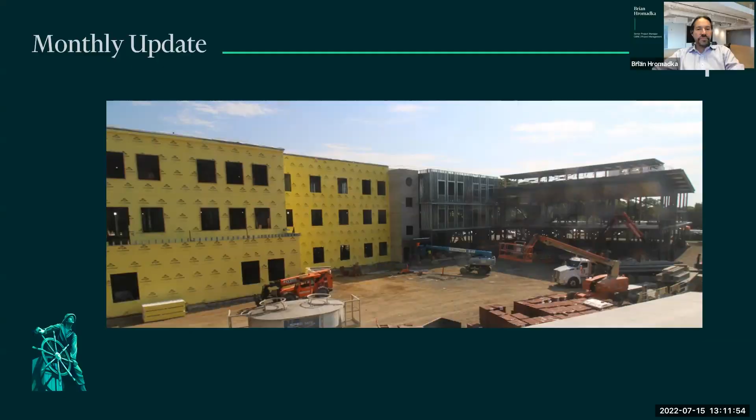Switch to the next slide here. So overall, the project continues to track to an on-time completion. We had a 13-day lag that showed up in the schedule last month, and that has been cut in half, leaving a 7-day lag in the current schedule update. You'll have that full schedule in the back of the monthly report. We're projecting that that 7-day lag will disappear in the next month or 2.

The CM has been actively managing all the work on site to keep things on schedule. We did have some slippage with the building B steel and glulam taking a little longer than anticipated, but we've had some expedited work with the interior rough-in that has helped to make up for that and keep the schedule where we need it. The project also is tracking to the budget, so that's good.

We continue to have some concerns about lead times, but so far we've been able to have the materials that we need on site when we need them so that the work can progress. Much of that is due to the CM being proactive with communicating with the subs and getting submittals sent in and approved earlier than normal. We're also still seeing construction prices very high, but thankfully, since we have fixed price contracts now on this job, we're protected from any further escalation.

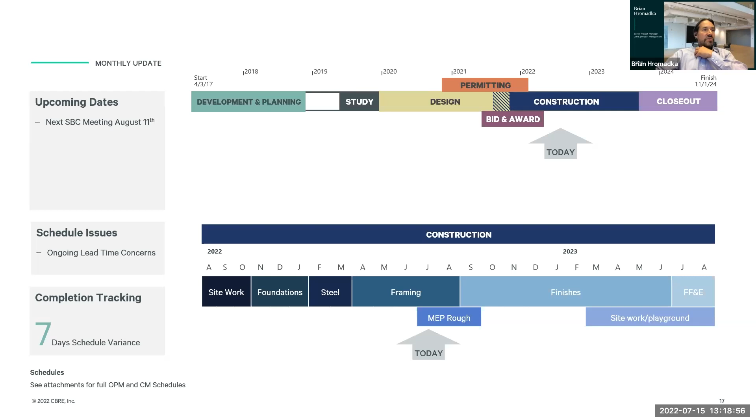The OPM continues to do the same thing pretty much as last month, managing the overall project. We've been finalizing decisions and contracts with the utility company and the health department, and also handling final site items with the school district—trash cans, benches, EV chargers, and the like. We continue to file regular reports to the MSBA to update them on the project and review potential change orders coming up throughout construction.

We are also keeping the community up to date. Last month we had a concrete pour in Building B that went off without a hitch. Notifications were sent out via email and flyers to all local residents. We have temporary construction lights on now at night on all floors, providing light during the day when workers are working since a lot of the building is enclosed, and after hours for safety and security on the job site.

We have one more concrete pour scheduled for the 21st, which will be a longer activity—the slab on grade for Building B. That work is expected to extend late into the evening with some work lights, but minimal noise. Once again, we'll be sending out notices to all the neighbors via email and flyers, and there's also information posted on the project website.

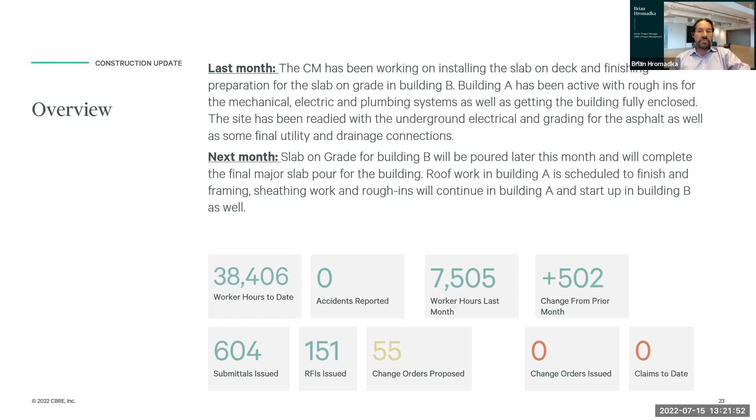CM continues to make progress with the work and run a job site free of injury with good, safe working conditions. They've been progressing a lot on the interior of the building, as well as the exterior of Building A, and some significant accomplishments in Building B with the steel substantially complete and almost all the slabs complete at this point. Here you can see some of the milestones we've been tracking throughout the job. Some of these have been ahead of schedule, some of them are behind schedule, but overall the job is tracking within the substantial completion date of June of next year.

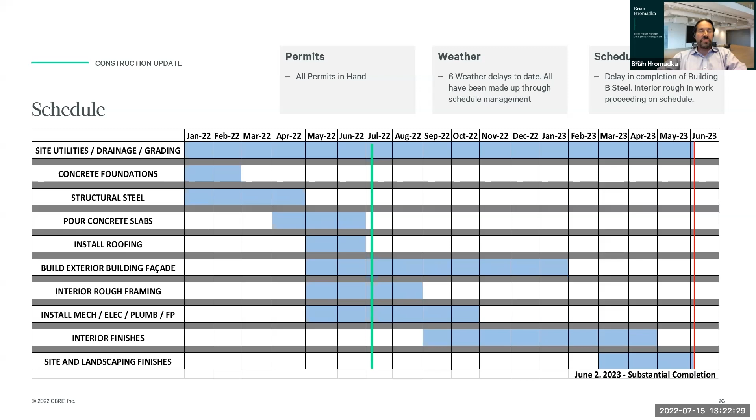So I will let our CM, Alex, walk you through some of the details about what's been happening on the site. This month we're going to look more at the interior of the building using the OpenSpace program that provides a lot of insight into what's been happening on the job. So I'll stop sharing my screen here.

And Alex, if you can pick up. Yeah, it looks like my screen sharing capabilities are disabled at the moment. I don't know if someone can let me in. Yeah, I think Maria can help us out with that. All set, thanks Maria.

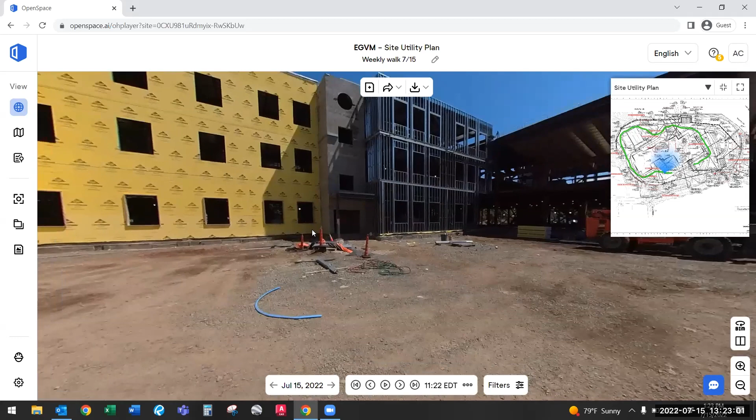Can you guys see my screen all right? Okay, all right, so I'm just going to spend a moment talking exterior. I'm sure many of you have driven by the building and seen what's going on, but I'll give you a brief tour of the exterior and get more into the interior, as Brian mentioned, in a second. So again, we're probably 75% complete with sheathing on what we're considering A building, which is the 3-story classroom wing.

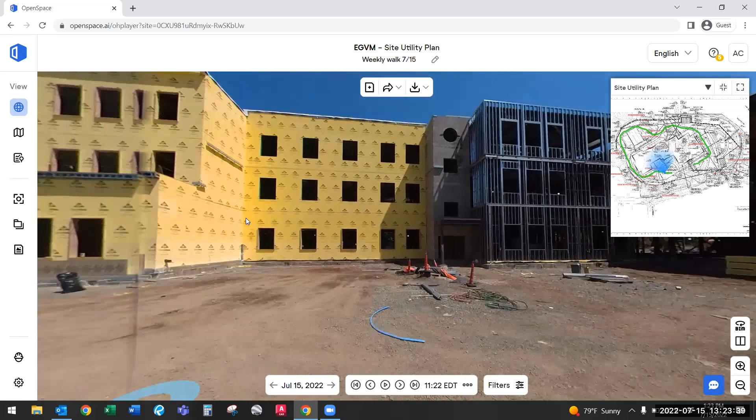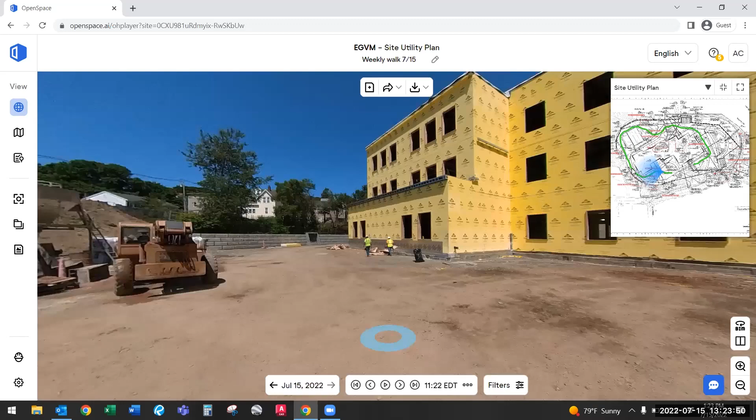You can see the stairwells, both stair 1 to the left and stair 2, fully constructed. We actually have stairs installed and poured with concrete, which is allowing us better access through the 3 stories of the A building. So again, 75% complete with sheathing, which is what we call, or what you see as the yellow material here. I'm going to work clockwise around the building.

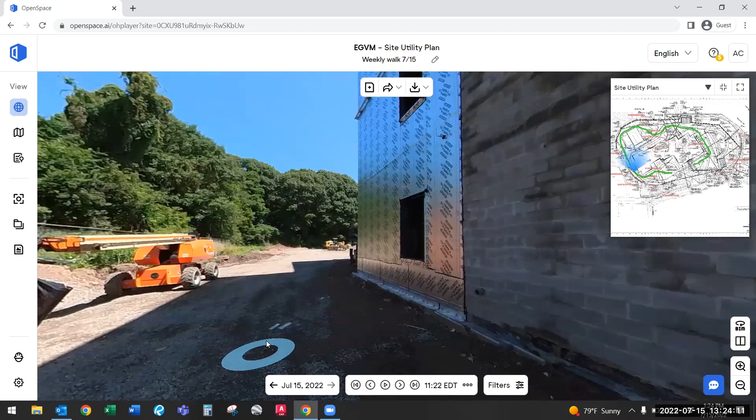So you can see this is stair 1, CMU shaft wall that'll get enclosed, or wrapped, with brick. This metal foil material you see is the air vapor barrier, so that goes on over the yellow sheathing. That provides a nice enclosure, not allowing air or vapor barrier into the building.

Working our way northwest of the building now, you can see most of the yellow sheathing is up on the back side of A building. You can see the amount of fenestration on the north side of the building as well, with all the window openings. This large area here is actually full 3-story curtain wall at the extended learning area.

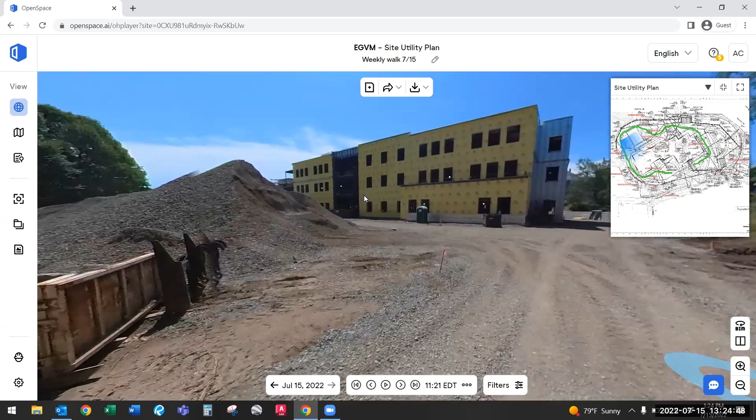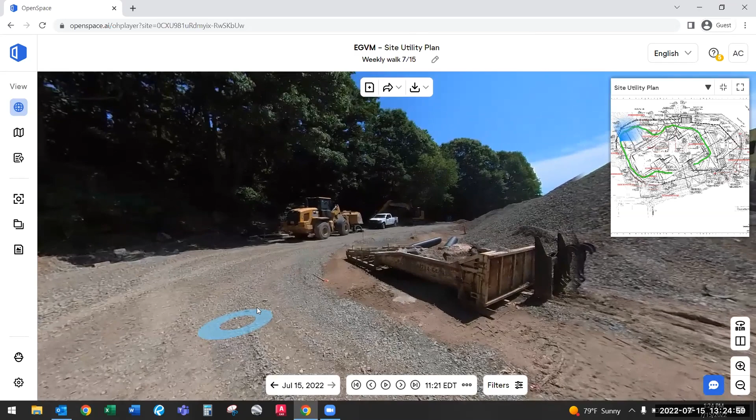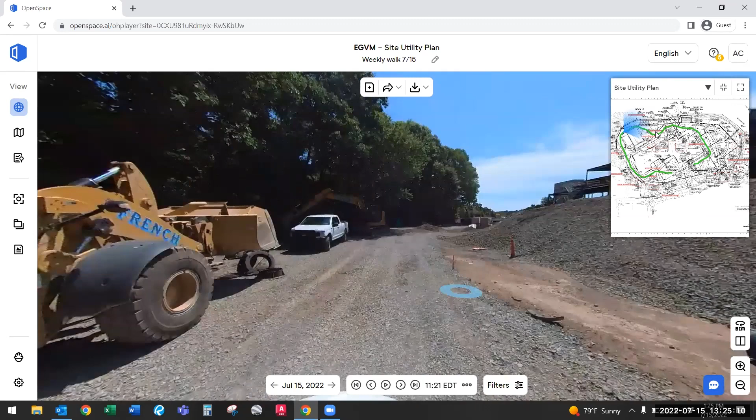So that's going to be a pretty dramatic space, both outside and inside, once we get the curtain wall installed later this fall. Where we're standing now is the play area. If you guys remember, there's a turf field back here, a basketball court as well, and a lot of line striping for children's activities, as well as the playground areas with swing sets and multiple play equipment structures. So I'm just going to bring you around here, looking back at A building, with this giant curtain wall area, a nice feature to the school.

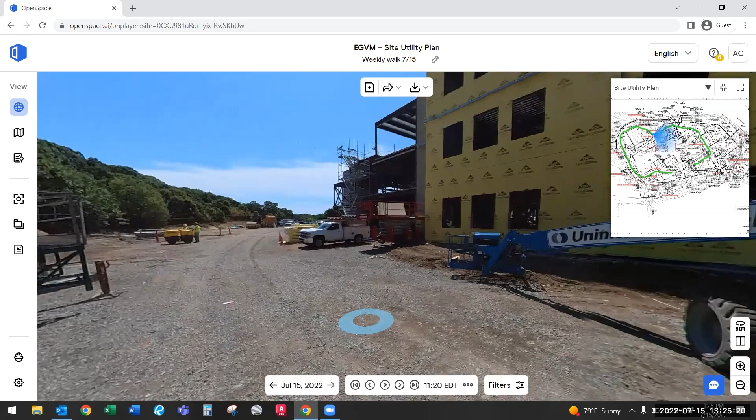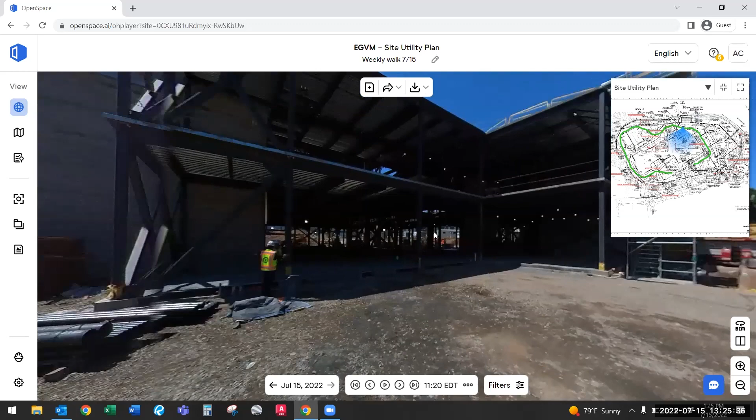We're working our way to B building now, which, as Brian mentioned, is following right behind A building. That's kind of an intentional measure — as we enclose A building, we focus on B building to follow after. So you can see the backside; this is the custodial area, maintenance area as well.

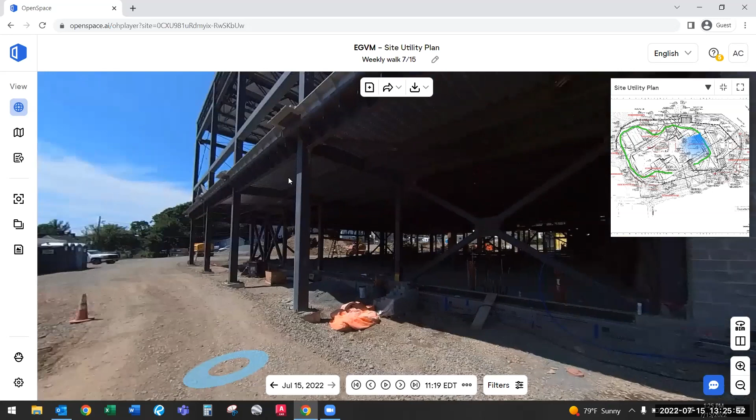On the eastern portion of the building now, looking into the cafeteria. On the area below, we've got an overhang here with some wood-wrapped columns, and right above it's the gymnasium. So again, a quick little exterior tour showing where we're at. As Brian mentioned, all the steel is complete at this time. Concrete's poured on the 2nd floor, and we're working to get the slab on grade in B building poured later next week.

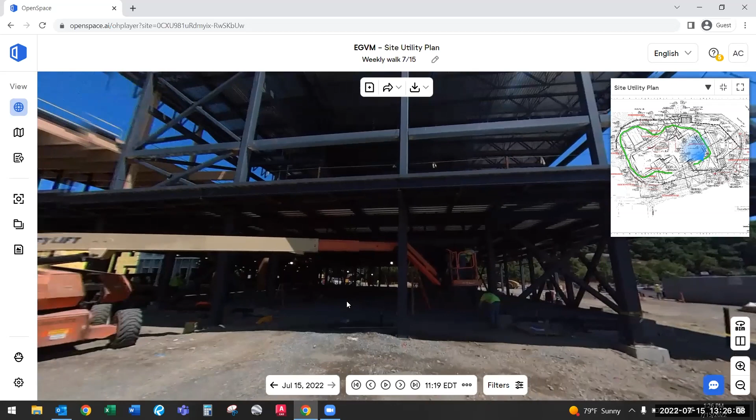I'll move to the 2nd floor interior, because that's probably the most progressed so far in A building. So as you can see... go ahead.

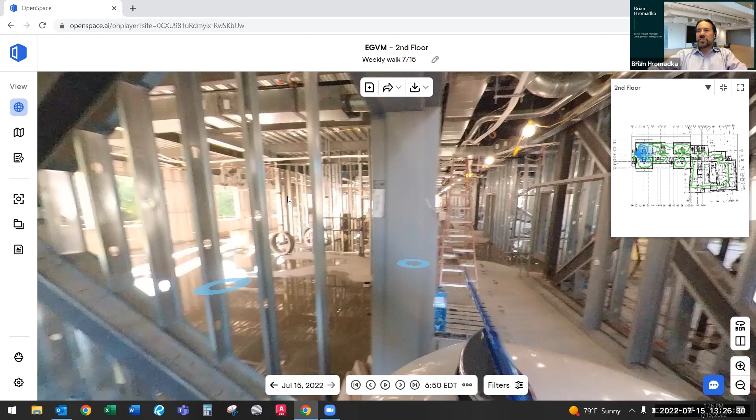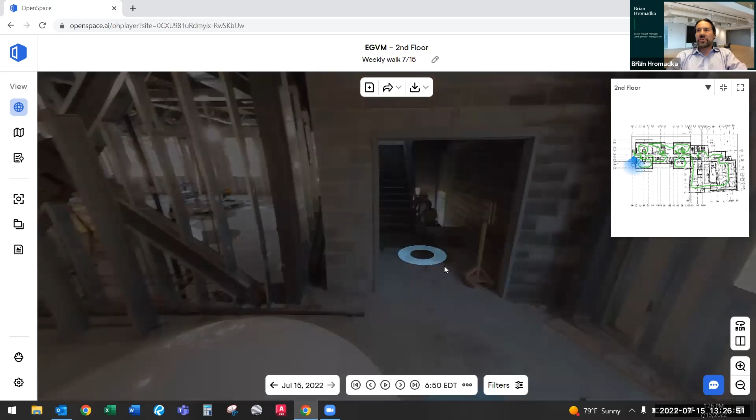Can I just throw in a comment, Alex? I just wanted to point out, as we're looking at all these images, one of the nice things is that these images will be available for the maintenance department, once the job is complete, for them to go back and see what was constructed, and what's behind all those walls. It's not just what we see now, but the record of this will continue throughout the life of the school building. Yeah, Brian, that's a good point.

The purpose of OpenSpace is really a documentation tool. So you can see the progress, identify any things that may be in the wall that are obviously hidden once drywall and paint goes on. We're hoping it's a nice tool for the end user to have for documentation purposes.

So as I mentioned, this is stair 1, fully constructed, concrete in the stair pans, which again allows our workers to get up to the 3rd floor without much difficulty.

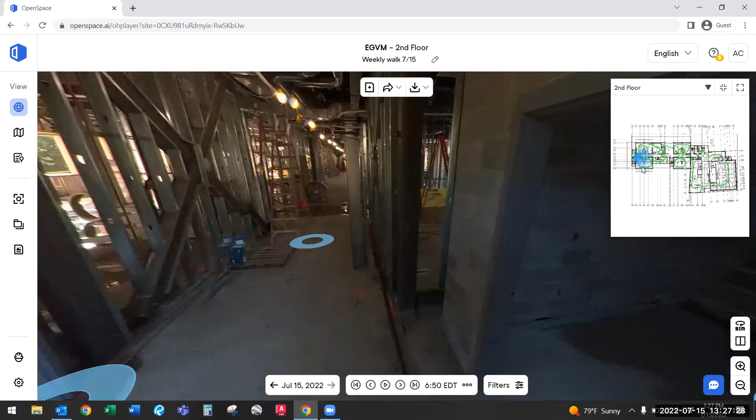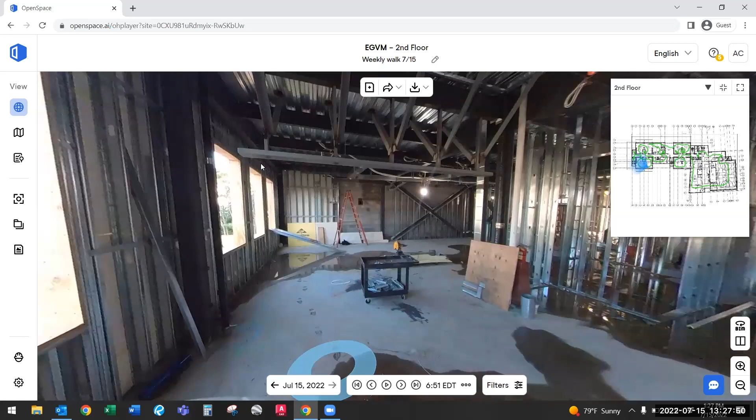This tour kind of zigzags in and out of classrooms, so I'll be brief. This is one of the larger classrooms on the 2nd floor. You can see the small group room, and then the side-by-side classrooms with the entry from the hallway. You can see the supplemental steel we've installed, which is where that folding panel partition is going to be, which will operate open and close to allow flexibility when you want larger group sessions between classes.

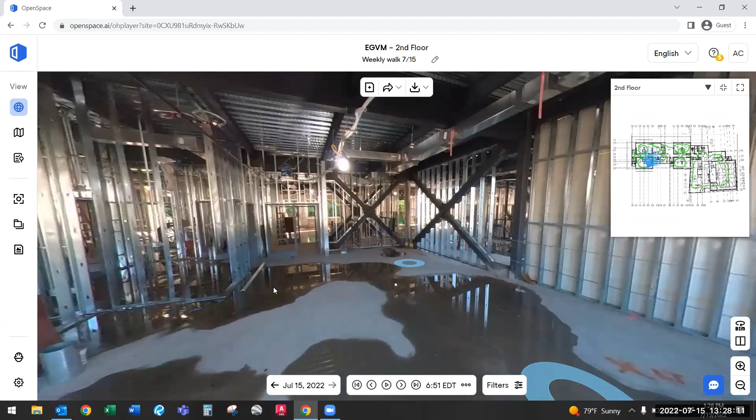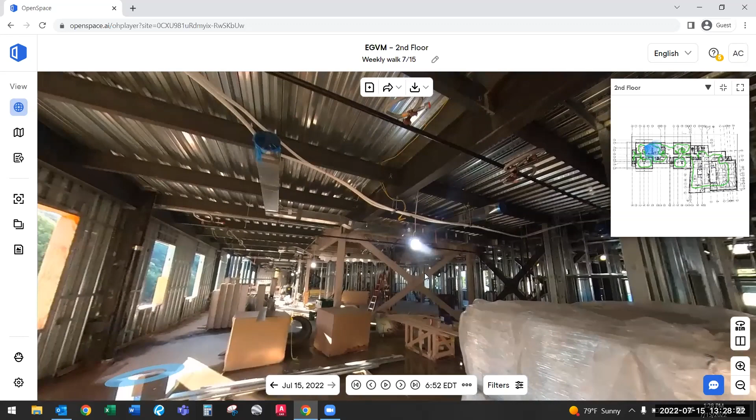Again, a ton of natural light with these window openings. We're expecting windows to be installed sometime in October. But that's sort of a typical classroom you'll see on the second floor, same on the other side of the corridor. You can see a lot of the guts of the building, a lot of the MEP stuff being installed, ductwork, riser piping, as well as electrical being started.

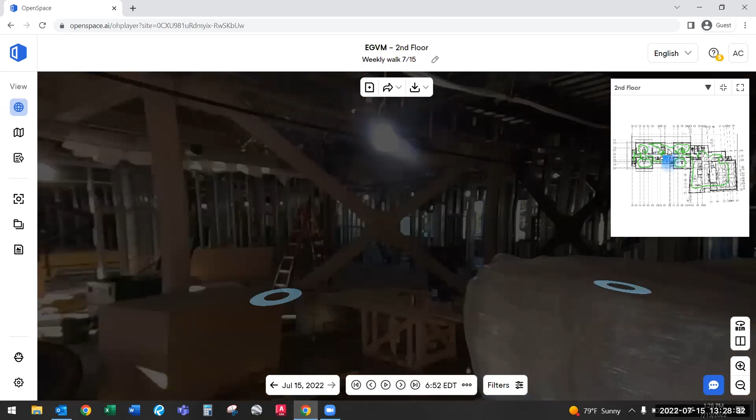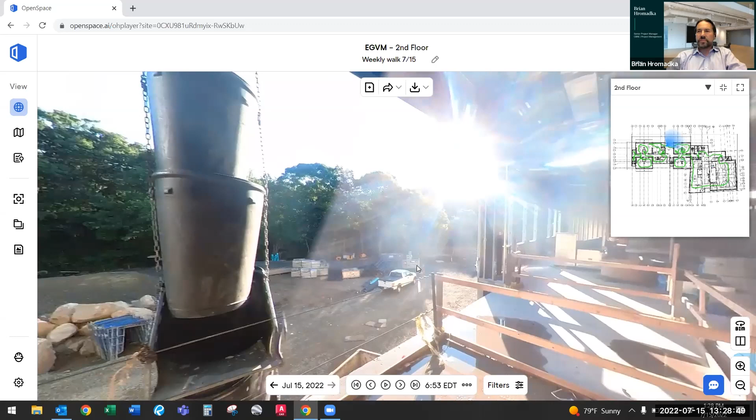I'll move down the corridor a little bit here. I mentioned the extended learning room with that large curtain wall space. We're using this as a trash disposal area to get material in and out of the building relatively easily. We'll keep that open purposely until we get the curtain wall, and then close it in with the rest of the building.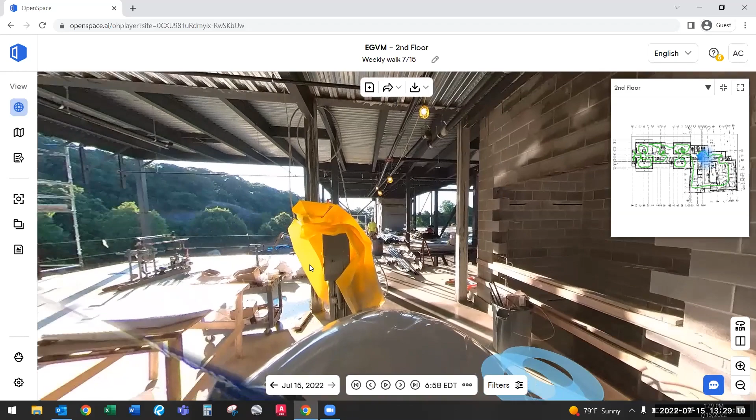I'll skip these classrooms since they're similar to what we looked at before. Now we're getting into B building. This is actually the elevator shaft we've constructed as well. We've got stairwell 3 right here, fully constructed, and stair 4, which gets you to the back of house area and the gymnasium as well.

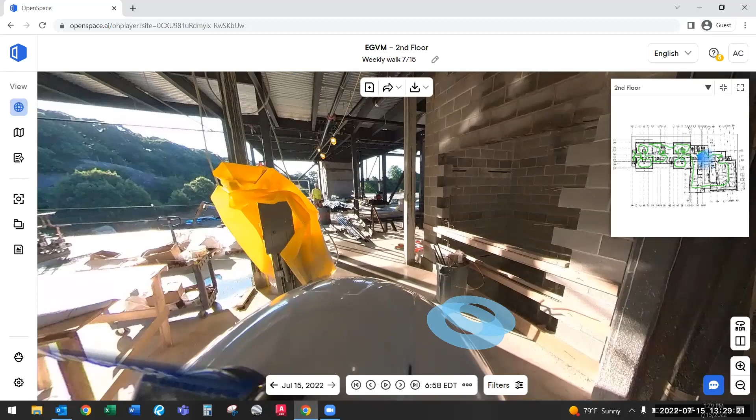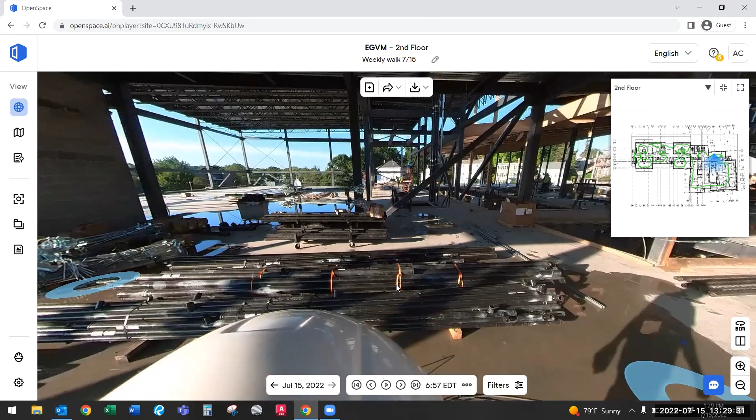So I'll work through what's now, or will be, the music room right here. We've got the second floor fire protection lines, a recent delivery on Wednesday, so that'll start going up in B building as well.

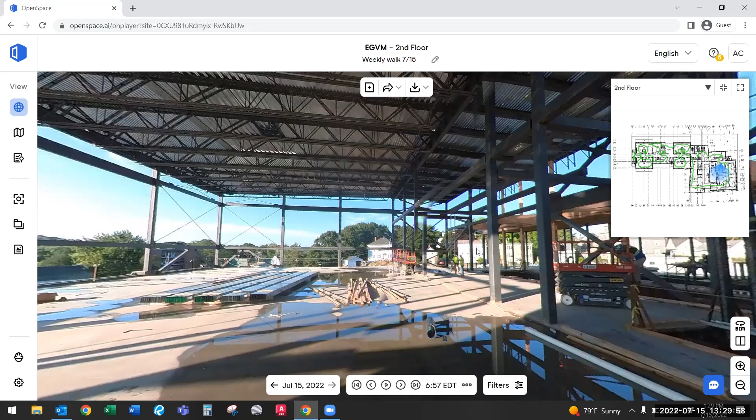We'll work our way into the gymnasium space, again, fully poured concrete slab. We've got stair 4 here, and this picture probably doesn't do it justice, but this space is just enormous - it's going to be a really nice gym space for you guys. There's also a platform here with a ramp that'll get you up to the platform, which will come together more once we get some framing up. Platform and gymnasium here with the wood floor.

Just giving you a kind of 360 through the gym, looking straight at the platform.

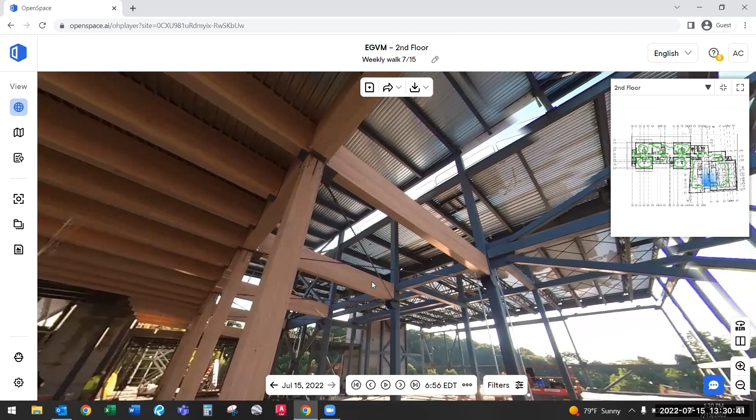We'll work our way into the sort of hub area, if you want to call it. Nice 3-story space, you can really see the glulams. I'm sure for those of you who've driven by, you've seen these wood beams and columns installed, but really up close it's pretty dramatic. This is going to be a 2.5, 3, 3.5-story kind of entry space into the building. This is the second floor looking up and down into the first floor. It's really a pretty dramatic space with all this stuff installed currently.

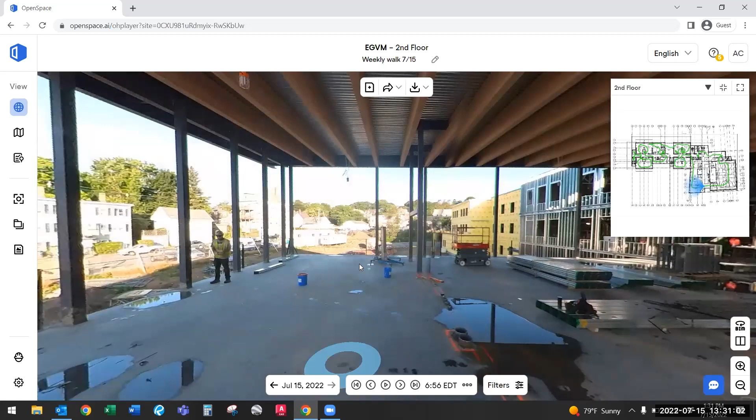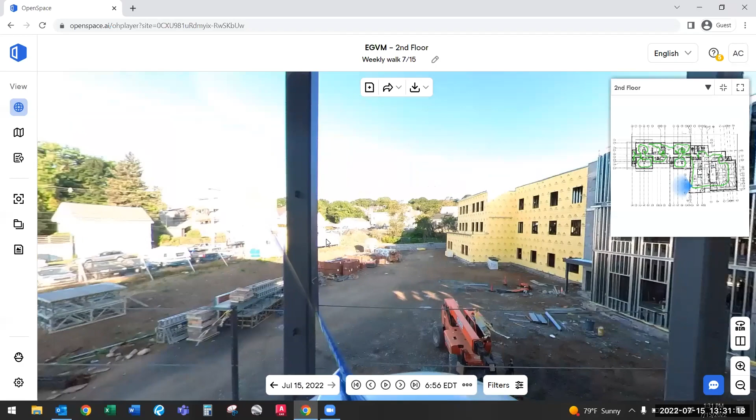Now we're getting into the art room, which is going to be on the left side here. This is actually supplemental steel for the garage door feature that will open and close between the art room and the media center. I'll get a nice shot of the corner of the media center and art room, where you can see just how cool these glulam beams are, all exposed. Really a cool space from Dore + Whittier.

So again, another pretty large media center space with a bunch of different isolated areas for different working groups to work in once the space is operational. So that's it for the second floor. Just wanted to give you an update on where we're at with progress between A building and B building, which is being constructed with rough MEPs and framing starting in that area. So if anyone has any questions, I'd be happy to answer them.

It was very nice, Alex. Thank you, Alex. Any questions? Anybody?

Windows are coming in the fall. Will be closed in for winter, right? Yep. When do they start putting the brick up? The brick's going to start Monday, Matt.

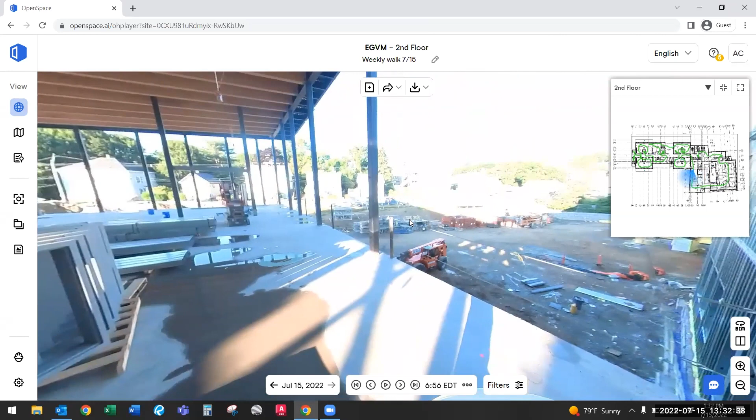We've got a little mock-up, and I meant to have a picture to show you guys. I don't think you can see it from the building, but we did do a stand-up mock-up just to give everyone a sense of what it's going to look like and work out some construction details. We'll try to get you a couple pictures to show what that brick's going to look like. Layout for the bricks starts Monday, and then the masons will go pretty fast—you'll be surprised how fast they go putting brick up. So it's going to dramatically change what this building looks like in the next few weeks to a month, if I had to guess.

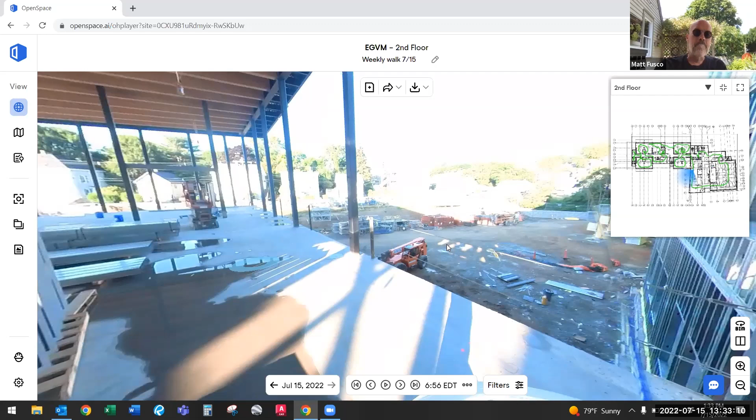Okay, thank you all very much. Well, that's pretty much all I had on the agenda. Is there anything else anybody would like to bring up before we adjourn?